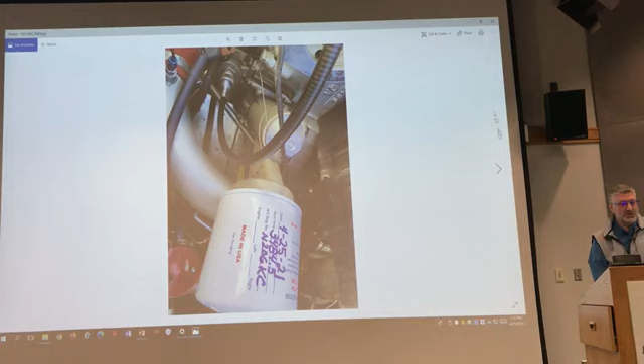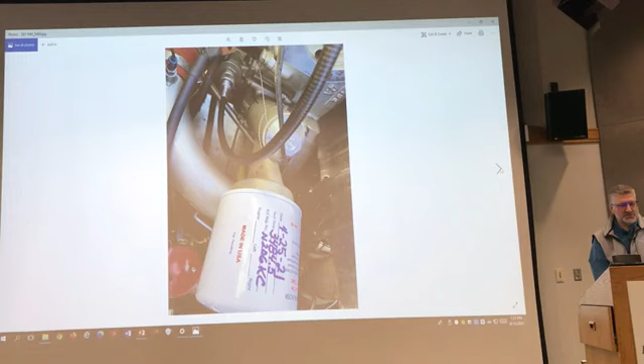So what was I up to that I was too busy to do a really good pull-it-out-of-the-water pre-buy on this airplane? Well, my 205 was in the throes of this freaking oil filter adapter thing. I took that on and off 4 times, built all kinds of fixtures to hold it, and it always moved within 2 flight hours. So that was torn apart in the middle of talking with Dr. Dave Schwartz and Tempest about what to do, and I ended up giving the thing to Dave to use in his research about getting better gaskets for that part. There's still a lot of issues with those they haven't fixed.

I had a CFI check ride scheduled for the end of the 3rd week or middle of the 4th week in July, and you try to fly the same airplane, the same 172, getting ready for a check ride. I went into the flight school at Merrill Field one afternoon about 6 days out from my check ride, went into the office, and the flight can and keys for the plane weren't there. I went out on the ramp and the airplane wasn't there, checked the schedule, and that airplane had gone out on a scenic flight 3 hours before. It was supposed to be back over an hour ago but wasn't. I alerted the flight school, and we subsequently found out it had run into the mountain over Eagle River and killed the CFI and the student in it. That was a bit of a delay of the game, added stress on my life there.

Meanwhile, trying to figure out if anybody in town could take any amount of money to really do a pre-buy on the airplane in late July, which they could not. So I tried my best in the evening after the day job, after flying, taking a look at things, but just didn't really do a very good job of it.

I did earn my first $100 bill as a CFI, giving a guy a 205 checkout, and then the circle of life, used that to buy parts for my 205, right? That's how the circle of life works. So that was good. I haven't done enough of that CFI earning.

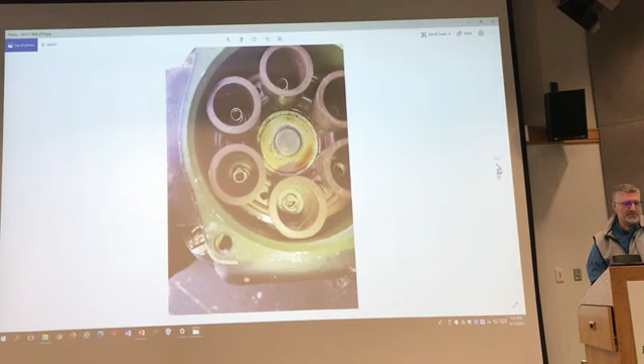But eventually got back and put a couple spark plugs in, still wouldn't pass a mag check. Took the harnesses off in the process, and almost all the cigarette tips in the spark plugs were corroded, similar to this lowest one on this would be the right mag, I think. A little scuzzy looking compared to these cleaner ones. The other mag, far worse, actually debris all inside the face of the mag there.

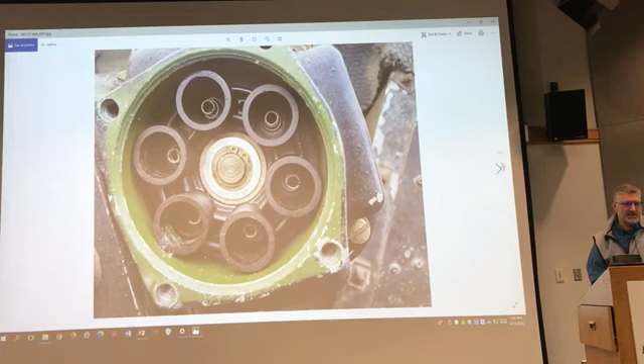I cleaned all that up the best I could. I got all new harnesses, all new fine wire plugs, and on my birthday, instead of helping my wife get ready for the post-Italy trip cheese and wine tasting that we invited a bunch of people over for, I was out doing all that stuff and then running this airplane up. It was really smooth. I didn't put the cowling back on for reasons that I'll show you, but it was cold and I didn't want to get it all the way warmed up. It ran smooth, but it still had the over 5 second long, very dirty, spitty idle cutoff shutdown.

And that in part, well, let me go to the videos, stand by. That in part had to do with this issue.

Again, this was annualed on July 24th. We bought the airplane August 6th. My partner tried to fly with them a week after that, but I had taken the top cowling off at one point. We never had the bottom cowling off. You couldn't really see that. Those air boxes have 2 supports in the front. The hardware for one was completely missing. Obviously, it flew into the annual and out of the annual, just like that.

I'm going to jump ahead since we're pressed for time, but this is the spinner bulkhead.

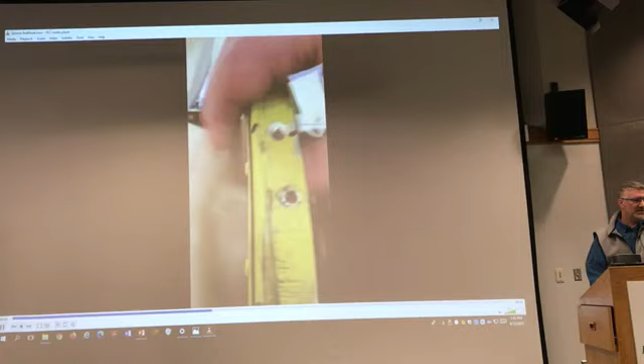Now, once we took it out of the water and I realized there was a bunch of stuff to do, I started with a full serial number verification, took the spinner off to get the number off the prop. And I don't have good pictures of this, but the inside of the spinner was really egged out where the prop dome touches the spinner. There's a little plastic piece that goes on there and you can change the number of spacers. This one had 4 spacers, and they weren't torn up. So at some time in the past, it got more torn up, not just from that plastic, it seemed like.

But everything looked okay from the outside, no spinner cracks, no backing plate cracks, but that whole backing plate can move. And the reason that it has strength is it's got 3 pieces riveted together. And every single one of those rivets is close to falling out. All 3 of those pieces of metal can move independently.

Now, if you didn't take the spinner off, could you tell that? There's a lot of black rivet tracks. That was cleaned up a little bit. So maybe, like it's not leaking oil, the prop's not leaking, the crankshaft's not leaking. What are all these gray radial lines everywhere? Well, once you take the spinner off, it's pretty obvious.

We'll look at some stuff in the back. So hockey stick. Who's had a hockey stick crack in a 180? Anybody? Okay. John knows all about that.

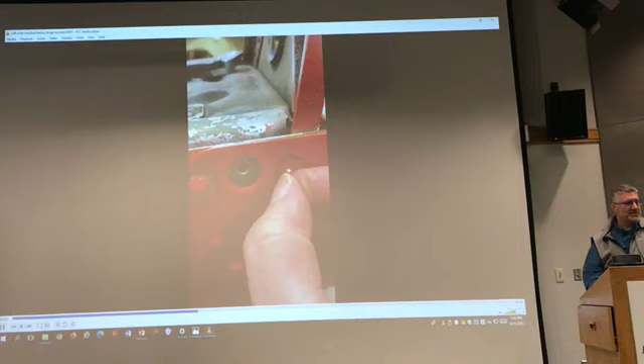But this, you can see how much that rivet moves, okay? And you can see the rivet to the left with all that silver stuff around. That rivet's very loose too. But this one was visually able to be clicked in and out and moved around. All 4 rivets closest to the horizontal stab hinge were like that.

And once I drilled the head off that rivet and took it out, this is what it looks like. The end, in the pliers, is where the manufactured head was on it. But that rivet was bucked at one time. I don't know if I can play that again. And just by being pried apart with the skins and the hockey stick flexing, it just sort of smushed the shop head or the bucktail back into an anvil and loosened it up.

And I would say a dozen rivets are like that on the tail. Now, if I had been less stressed and taken more time, I could have stood in the water with my hip boots and found all that at the float slip, but I did not.

Okay, I knew it was messed up. We negotiated the price, and that was all good. We lowered the price a little bit.

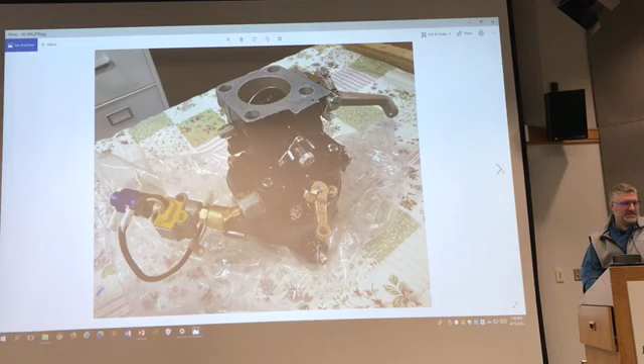So, the airbox had issues, the dirty idle cutoff had to be taken care of. Not the loose airbox. So what's an aviation monetary unit? Is that $1,000 still? Or with inflation, has that changed? So you give Allsworth's $1,000 and they give you a nice rebuilt carburetor back. I could have rebuilt that carburetor myself as an A&P in my garage or kitchen, but I've investigated accidents where a mechanic rebuilt a carburetor improperly and killed somebody, and I'd just as soon write the check for $1,000.

And getting in the hangar was good because, under the ventral, or dorsal fin rather, it looked like there was never any paint. So there was this little corrosion signature everywhere. There might have been a thin coat of white, off-white or gray primer on there from Cessna, but it sure didn't look like it was ever alodined or primed. And I had to clean up a whole bunch of corrosion there. I got all my new access panels put in, another couple AMUs while there.

And, oh, here's another good one. This rivet looks really good on the outside. It wasn't all slimy like this one. This one was starting to slime and move. But this rivet looked really tight from the outside.

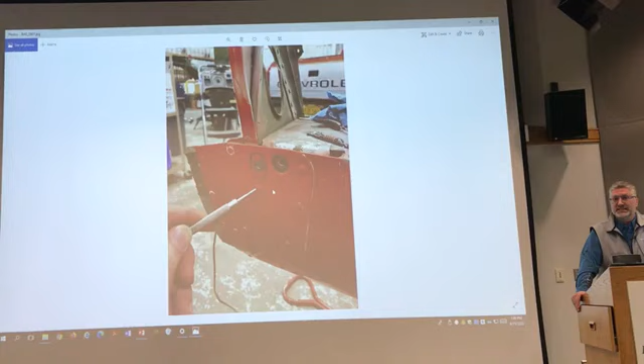And here's the thing about not taking stuff apart to inspect it. This mechanic allegedly said that he borescoped this tail to do the hockey stick AD inspection. Now the last thing in that AD says, also check for loose rivets, which he obviously did not do. So maybe he's just inept and didn't follow the instructions or didn't do a good inspection. But he said he borescoped this to look at it.

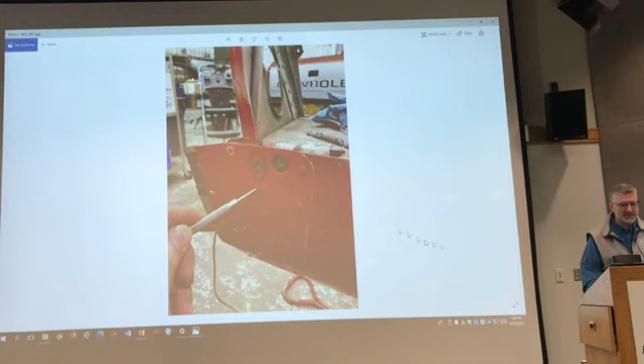Now once you take the horizontal stabilizer off, and we're just gonna climb up and look down in between the outer skin and the structure, then you get to see the other end of that rivet, and it's right here. That rivet is only held in with paint. And it has had a really nice life. That has never seen a bucking bar. It has never been harassed or molested in any way. It has just been along for the ride.

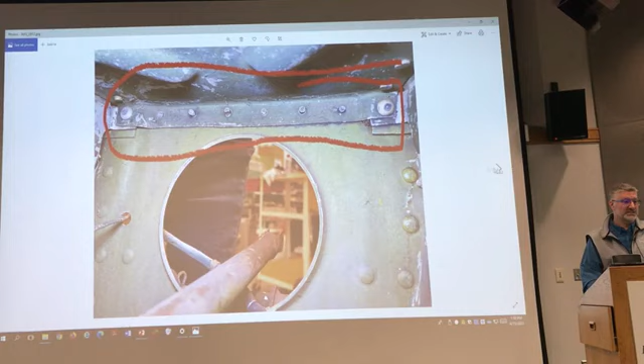But some of its buddies, from the horizontal bulkhead to the aft fuselage bulkhead, these are driven by a flush set because the guy didn't have a big enough set to drive those ginormous rivets. And these are just smashed, peened over, chopped in half, underbucked.

These ginormous rivets are in there because this is the inboard stabilizer hinge bracket. The hole that rivet goes through is even more egged out than that rivet could save, because all of this stuff has been drilled apart multiple times in this airplane's life. This little gray slime trail shows you the horizontal bulkhead under the stabilizer and the rear bulkhead that supports your vertical fin spar were moving back and forth, which is part of why there's so much fore and aft motion in the horizontal stabilizer.

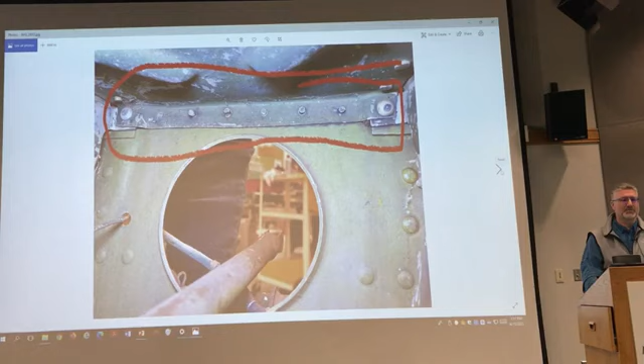All objectively unairworthy, and you could see that with an inspection mirror after you took the tail cone off the fuselage. So I'm embarrassed for my profession, and pissed off as an IA, and also at myself for buying this airplane in as-is condition, but I did that voluntarily and that's on me. But it should not be okay that we have people signing off annuals like this.

Now here's a patch that I drilled off, and this little line is where the crack that patch was trying to save, and the stop drill, was at. That's on the horizontal bulkhead under the stabilizer, and this thing was just hiding under there when I drilled the patch off. But here's the crack. Somebody did stop drill it. My scribe is in the stop drill that it flew in with, but you can see...

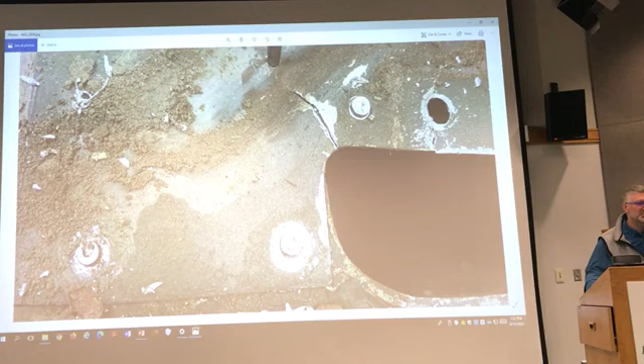If we had Dr. Dave Schwartz here, he would talk a lot about this, but this is not just a crack. This has been hammering on itself back and forth. You see, this would normally be a nice smooth radius here, but the material has been hammered out, and there's strange shapes to the edges, and this is undercut. This is like two tectonic plates doing this and this, all the time.

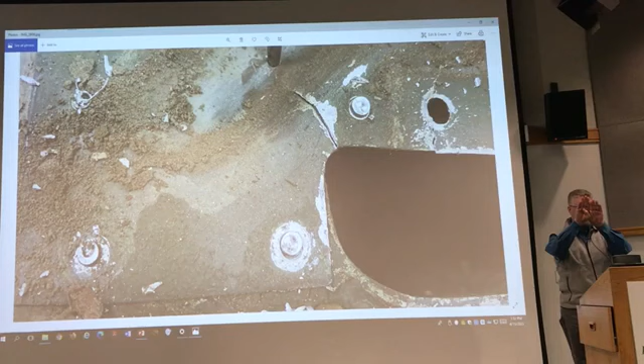And even this one, if you look at the displacement of the material, this cracked at a rivet hole, but then this thing has been side-loaded so much that it started to twist the crack, and so these two edges are offset. So I had to file that straight before I riveted a new repair on there.

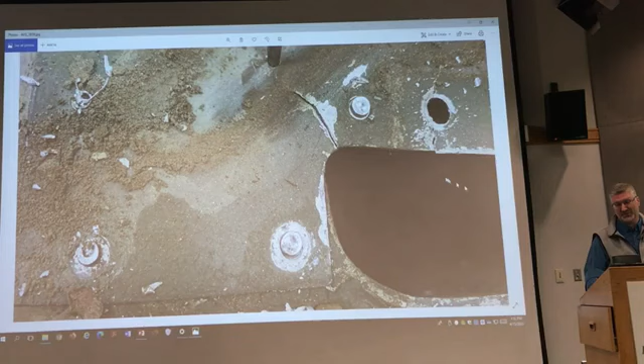Again, all visible once the horizontal stab is off. You can probably see that on the borescope. It's objectively unairworthy, you can see that.

Is that one rivet not even covering the whole hole, the bottom one? Well, these were - I drilled the manufactured head off and popped the patch off, so I didn't knock the rest of the rivet out yet.

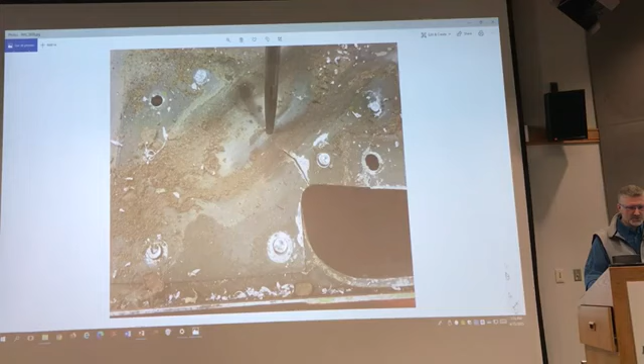I don't know how to get back to my thing here.

How much time was on the airframe? What is it, 3,500-ish, something like that? Not a lot. Now the airplane had damage history, and it had some significant repairs, and some of those I wasn't real happy with either, but I have no problem with maintenance history. None of that stuff looked like it was working. It was documented more or less, so I was aware of that, but I wasn't aware of all this stuff going on the tail, and some fellow IA had just signed off the tail AD erroneously, to be charitable.

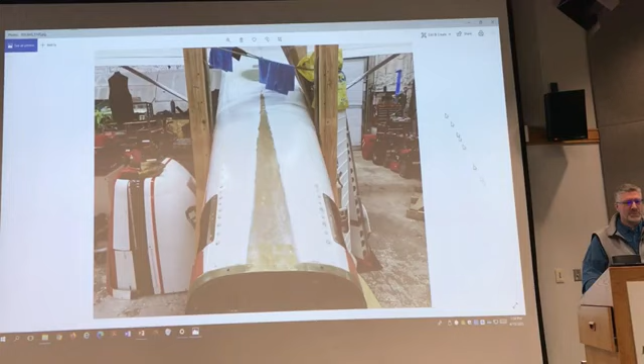I don't know how to get my arrow back there. Well, you know that new program you guys have? Yeah. Talk to us about that - that's why nothing's gonna happen to that mechanic. Well, we won't talk about that today while I have my non-FAA hat on, because I might be unprofessional.

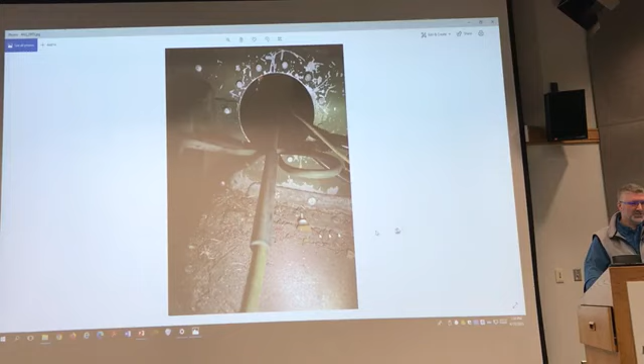Most of this, in the pilot's - forward of the pilot's door post, the side kick panel there - goes to nothing. I took, I don't remember the exact amount because I didn't weigh it separately, but I think I took 10 pounds of stuff, just wiring and antennas that were broken or not connected to anything anymore, out of the airplane. Again, why give away the useful load? Just take the stuff out.

That's rust - how long does it take for that to look like that? Now, in fairness, there's a nice coating, ACF-50 or something, on everything, but that's way far gone, and then the rusty piece starts eating into the aluminum. It's just not good.

That little bushing just hangs onto the front of the tail spring, and it takes some loads, but in the bigger picture, it's not like a main wheel gearbox. I get that it's not as serious, but...

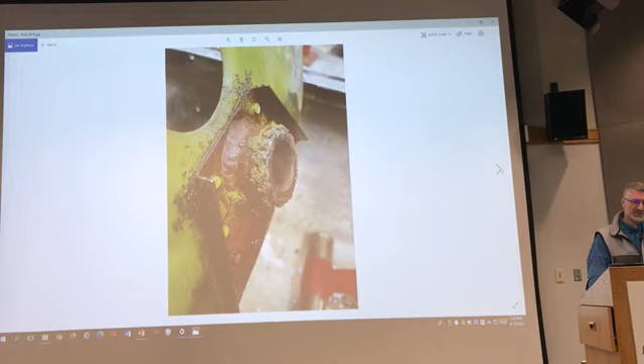Here you pull the tail cone off, and you're looking at the skin that comes up to the bottom side of the elevator on the right-hand side. I'm pointing at a rivet there, and one of my fingers is gone. You can see this one is Leroy's Pancake House, bucked way too flat. Some of these are not too bad. This hole right here, I still don't know how big of a bolt I'm going to have to put through that, because there's no rivet that will do that now.

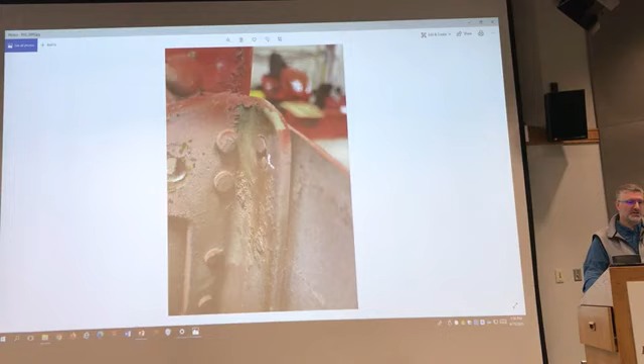That's where those big, ginormous rivets smashed with a flush set were on the inside. But this rivet clearly is not even contacting the edge of the hole. Once I drilled the shop head off of it, I could just push the thing out with the punch quite easily. There's no grip or tension on that rivet at all.

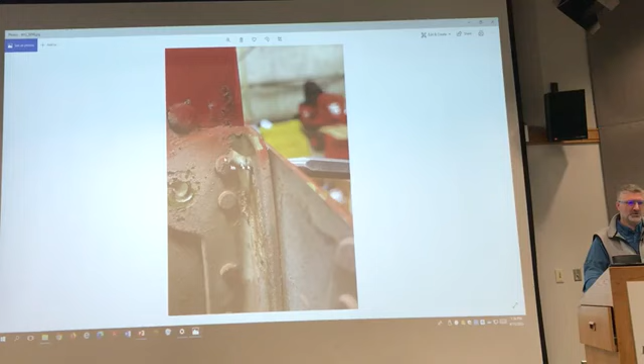It was bucked at one time, but it wasn't bucked very much, and the relative movement between these two parts just smushed that thing back out to... skinnier. But you know, eventually you take all of it apart, you drop some more AMUs on the thing, you make repairs, and you start riveting it back together.

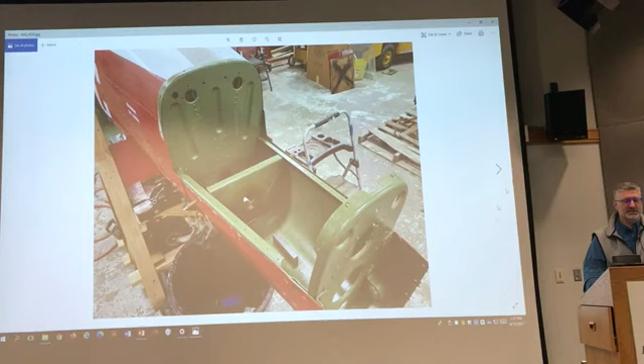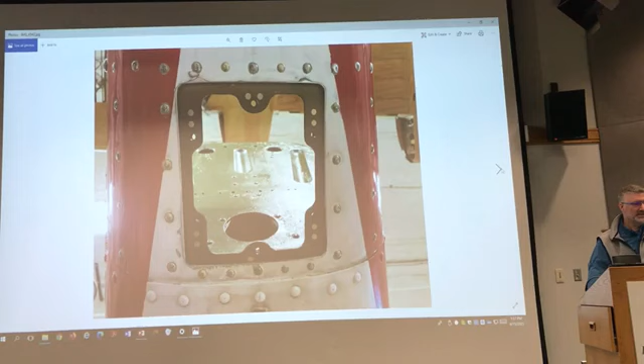This is even before I cut my holes there for the different access kits. You can put your lower jackscrew access kit in, which is way nicer to do once you drill all this stuff out, because then you can take it out and realize all the places that you need to shim it, because none of the contours match your airplane on the new manufactured parts.

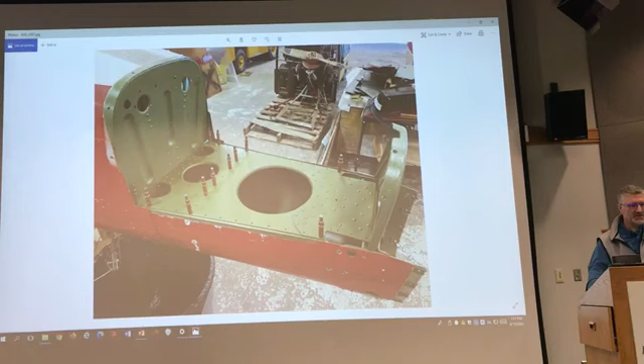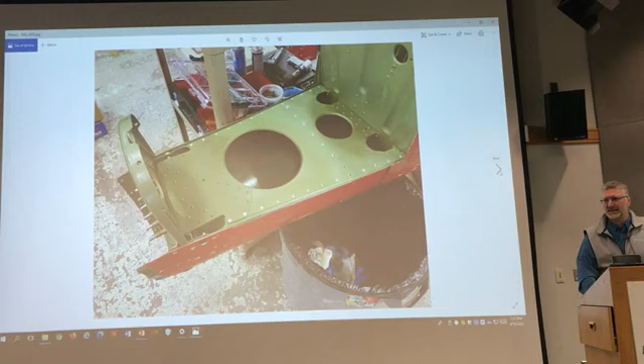Here's more of a real structural repair for that panel. It was getting all beat up here. This is where that little crack was that I was showing you before. I have a heavy structures background, so this stuff doesn't bother me, but it's just really time consuming and depressing, you know, to have to do all this.

But you know, it's cool to get the accessories. It's nice to be in a hangar. We loved being in the museum hangar. $50 a day, $8,900 I paid them last year, and I still got kicked out before I was done.

But you know, armrest, backseat armrest, screws, chewing into the aluminum. This was all corrosion that I took out, alodined, painted. You know, that stuff should be kept up with, right?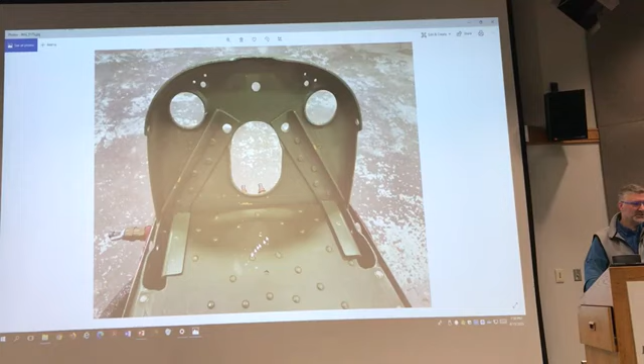Then you get your repairs riveted back in, and you've got to put in your new horizontal stabilizer hinge brackets. Now, I could not have used the old brackets over again, even if they were pristine, because I put a 40 thousandths doubler on top of this, so it moved those brackets up, and none of the holes would line up. But it took me 4 sets of brackets, the last set custom made to my own drawings, to have wide enough perimeters to cover all of the oversized rivets and past repairs and migration of holes and everything. So that was another 1.5 AMUs by the time that was done.

Who made that bracket for you?

BVT in Australia, BVT Aviation. They sell them by part number off the shelf, but I custom spec'd how much material to add all around the edges, and the service was excellent from those guys.

Did you replace a hockey stick on both sides? No, they were fine. Nothing was riveted together tight enough to crack a hockey stick.

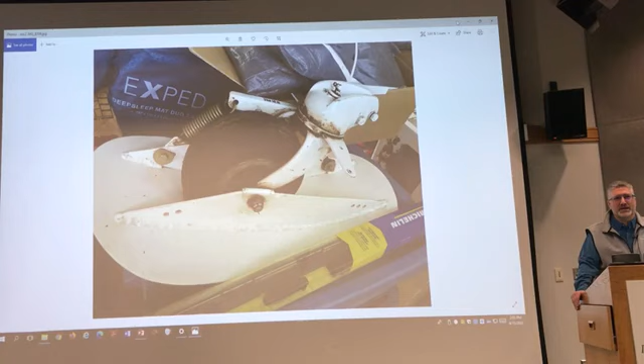And, you know, I meant to start the show by asking if anybody knew what AIDS was in aviation. You know, aviation-induced divorce syndrome. I don't have that. I have friends that have that, and I've managed to not have that, which is one of the reasons the airplane takes so long, because you still have to stay married if you're into that sort of thing. You know? But if you're not, then you can work all night long and spend all your money on the airplane, but it doesn't work like that for most of us, right?

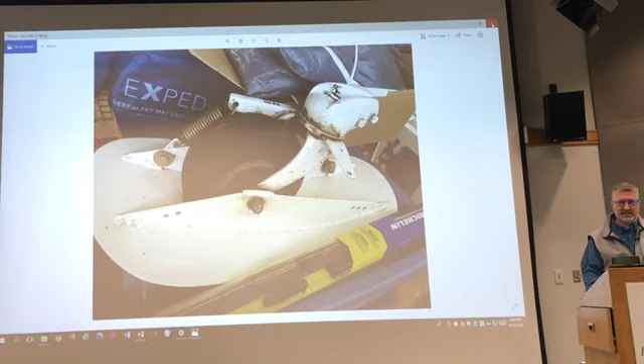So you know, we do the best we can, but if we all do better together and we don't accept this kind of nonsense that goes on for decades on an airplane, then all of our airplanes will be in better condition, and it truly will be cheaper in the long term for you, and you'll have a better airplane if you decide to sell it. It'll be worth more, and it won't let you down when you're out in the woods doing your fun guy stuff. And I guess that's the point of the presentation.

So it's not hard to see a bunch of this stuff. It's also not hard to know things that you then don't share with your mechanic because you don't want to write the check for it. But that is, in my view, the wrong approach, right? You should share everything and have conversations about this is airworthy, this will kill you, we got to fix that. That's cosmetic, let's not worry about that. You can go home and put some spray paint on that yourself, you don't have to pay me. But let's be having more of those kind of conversations and not let stuff get this bad, annual after annual after annual. Okay? Thanks for staying.